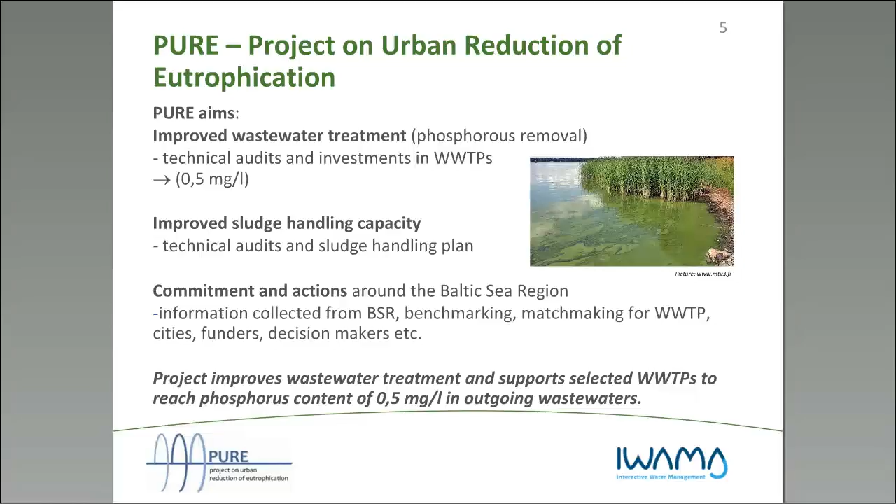So quite a few IWAMA partners have been involved in PURE. Oh, I guess we will come to the partnership in a while. The main goal of PURE was to improve wastewater treatment in respect of phosphorus removal, and it was largely built on our cooperation with HELCOM and aimed at reaching HELCOM's norms to reduce phosphorus content in the outgoing wastewater to 0.5 milligrams per liter. And other aspects that PURE dealt with also included improving sludge handling capacities of our partners, and in general trying to benchmark and commit to more intensive actions to fight eutrophication.

So we can go to the partners, who apart from the Union of the Baltic Cities Sustainable Cities Commission back in those days, also consisted of the John Nurminen Foundation from Helsinki and HELCOM, as I already mentioned, who was dealing with information dissemination and communication activities in the project. Other than that, we had several partners that are also present in IWAMA, as I said. It was Jurmala Water Company, Water and Sewage Company of Szczecin, City of Gdańsk, but we pretty much cooperated in practice with the Water Company of Gdańsk, and Lübeck, who is now one of our associated partners in IWAMA, was one of the regular partners in the PURE project.

Apart from that, we also had Riga Water Company, the Kohtla-Järve plant in Estonia, Mariehamn town, and Brest Water Company from Belarus. I hope I mentioned all, not quite in the order they are listed here. So some of the outputs worth mentioning in the PURE project included technical audits and reports that were conducted for almost all partner plants, I think, apart from Riga, who had from the very beginning an idea of what they wanted to invest in.

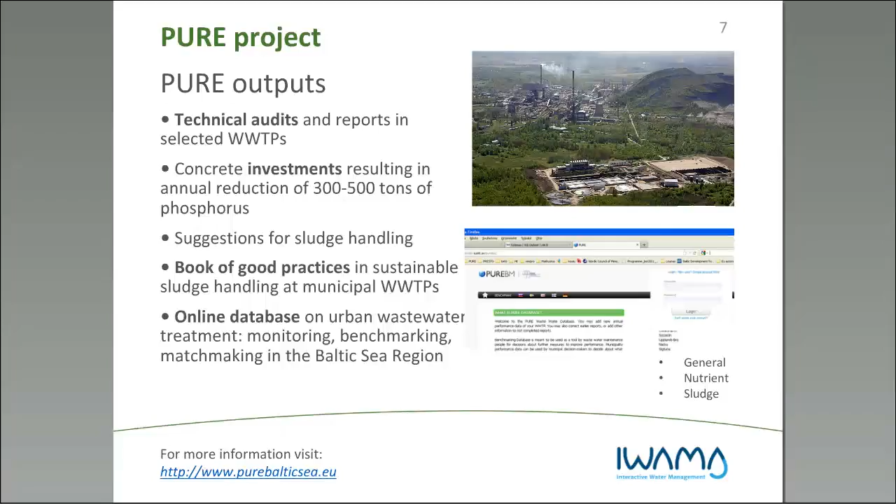There were also some concrete investments that altogether resulted in a substantial reduction of phosphorus. There were also suggestions for our partners on how to improve sludge handling based on project activities. In the end, we had a book of good practices on sustainable sludge handling, which also covered some of the legal constraints that countries had at that time, in 2011, for their sludge management, but at least we know that on the EU level not much has changed in that respect. One of the outputs was also an online database for urban wastewater treatment, which should help monitor how the process is looking on the level of the Baltic Sea region.

So now in the IWAMA project, we try to do this benchmarking in a bit of a different way. But as a result of PURE activities, 3 partner wastewater treatment plants - 2 from Szczecin and 1 from Kohtla-Järve - have been removed from the HELCOM hotspot list, which is a concrete achievement showing how the project managed to decrease phosphorus inputs and make a difference for the Baltic Sea.

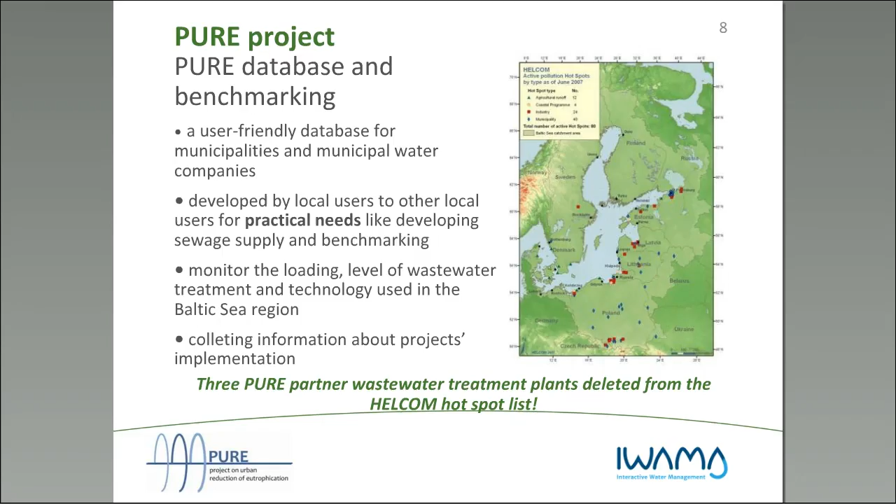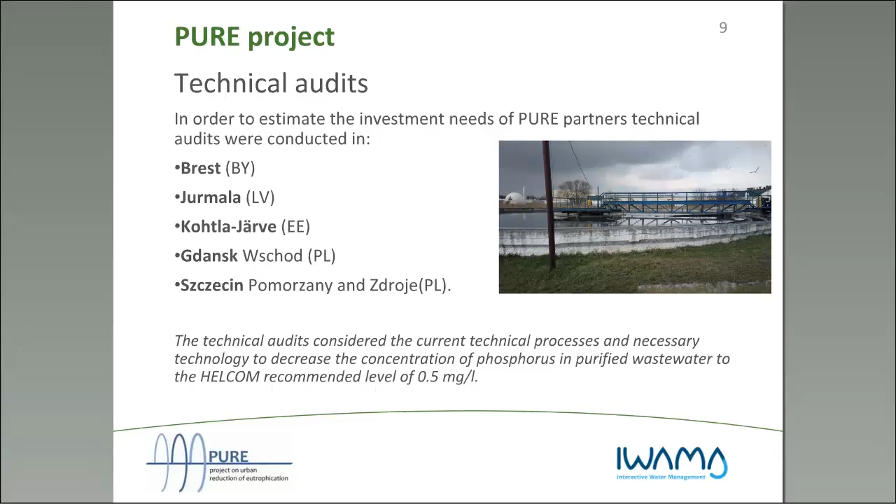Oh yeah, that's the map. Here's the map. In PURE, we had technical audits conducted in order to estimate which investments are needed, and some of those investments were still implemented within PURE's duration. The technical audits were done by an external consultancy company, a bit differently than we are doing it now in IWAMA. But altogether, the plants from Brest, Jurmala, Kohtla-Järve, Gdańsk, and Szczecin received audits and information on how they can improve their current technical processes in view of decreasing the concentration of phosphorus in the purified wastewater.

Based on the results of these technical audits, we had investments implemented in Riga and in Jurmala. I mentioned before that in Riga it was actually defined without the technical audit. So in Jurmala and in Brest - but Brest is going to be on the next slide. So, investment in Riga: you can see here a description of it. There were storage and dosing tanks for chemical precipitation installed, and also magnetic flow meters and an additional sludge thickening centrifuge. In Jurmala as well, new airflow meters, an additional polymer station, and the division of the aerobic and anaerobic zones.

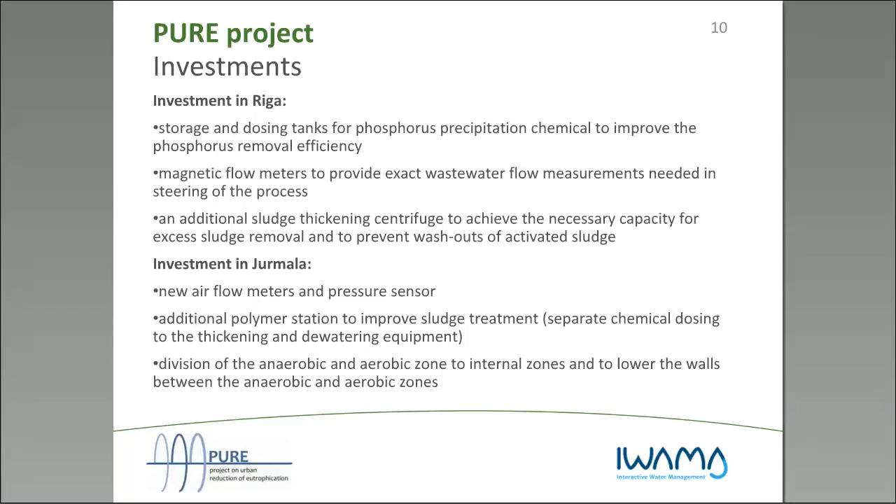You can read a bit more about PURE's outcomes in the brochure, which was our final publication. But I don't have it linked, unfortunately, anywhere. Yeah, these plants have been investing, and now Jurmala is going to invest in the IWAMA project as well.

PURE has also had its first pilot investment in Belarus of such kind. It was in Brest, and due to various reasons, it has been recognized that there is a need to export these good practices also to countries outside the EU, but still contributing to the state of the Baltic Sea through downstream pollution. So this was one of the integral steps to take, and because of that, it was recognized that there is potential to implement cost-effective measures that can improve the state of the sea.

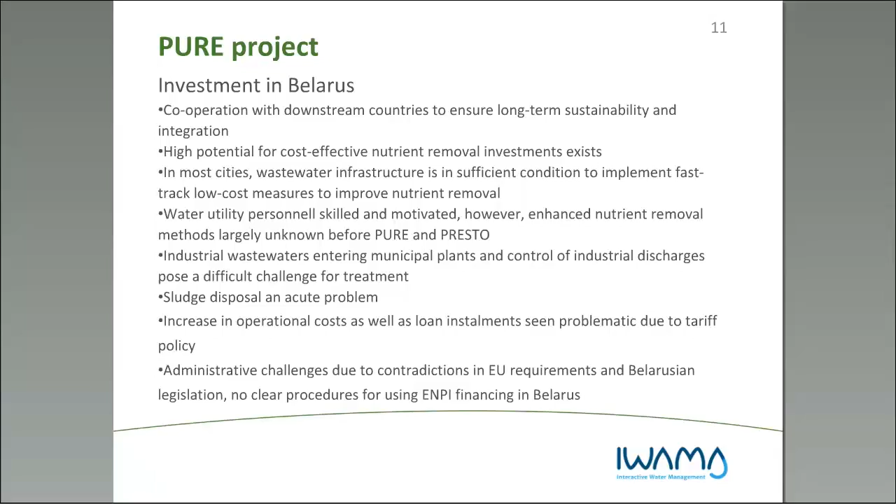The water utility personnel in Belarus were highly motivated and willing to improve their methods of work, but not necessarily possessing all the technical knowledge about enhanced nutrient removal or the need for it. There was also a great problem with industrial wastewater treatment and sludge disposal. Altogether, we have also encountered quite a few administrative challenges because of contradicting EU requirements and Belarusian legislation norms. But there was initial work started in this field and hopefully it will continue afterwards as well.

So a couple of more concrete words about the investment in Brest.

So the city is located very close to the Polish border, and it discharges through the Bug River to the Vistula River, and then all the discharges still end up in the Baltic Sea. And they had a very high phosphorus concentration in the outlet.

The PURE project investments foreseen chemical storage reservoir that would help to implement the chemical phosphorus removal system, dosing points before primary sedimentation and after secondary sedimentation, and altogether the annual load has been reduced up to 250 tons per year.

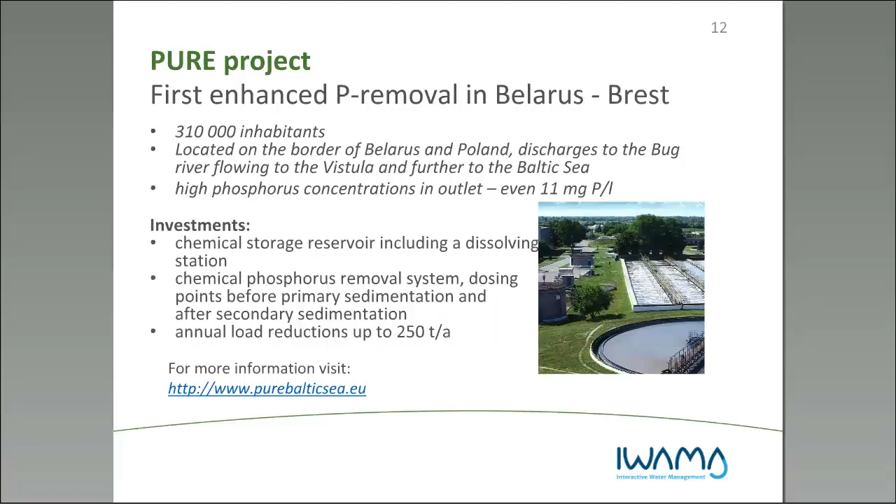As I said, there were different complications in this process. We had to extend the project in order to arrive at these positive results, but nevertheless, somebody has to be the first one to do it, and we are really happy that we started this work, which later has been quite successfully continued by the PRESTO project.

Again, PRESTO - some of the other partners of IWAMA have been partners in PRESTO, and it's the project on reduction of eutrophication of the Baltic Sea today, and it's been also funded from the same funding instrument, Baltic Sea Region Program 2007-2013, starting in 2011 and continuing in 2014.

So PRESTO approached what has been done in PURE and tried to mainstream the results, tries to do the concrete investments in more Belarusian wastewater treatment plants, but also it recognized some other needs that had to be taken into account.

So apart from clear environmental goals that PRESTO had to reduce the nutrient load for approximately 400 tons per year, there was also consideration for capacity development needs taken into account. And in case of PRESTO, it was mostly concentrating on university level education.

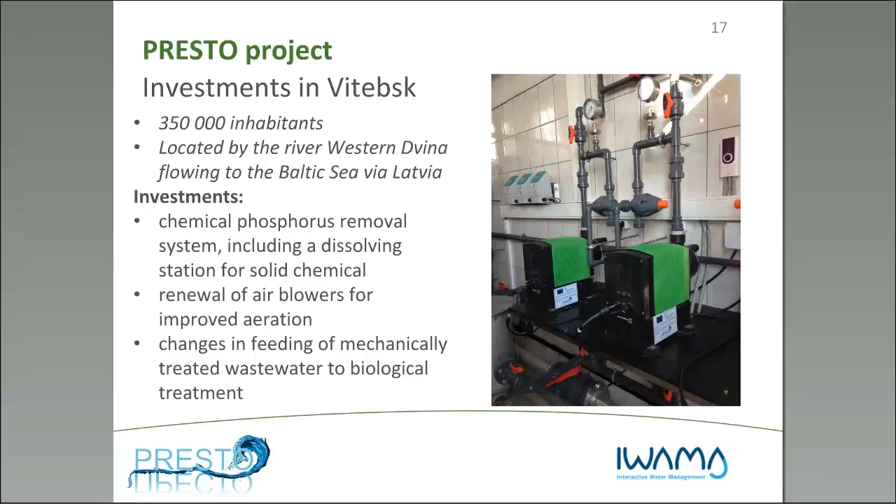So in Vitebsk, there was a chemical phosphorus removal system introduced. The city is located by the river Western Dvina, which also flows to the Baltic Sea via Latvia. It's a very big city of 350,000 inhabitants. And the improvements of PRESTO have included also the renewal of air blowers and changes in feeding of mechanically treated wastewater to biological treatment.

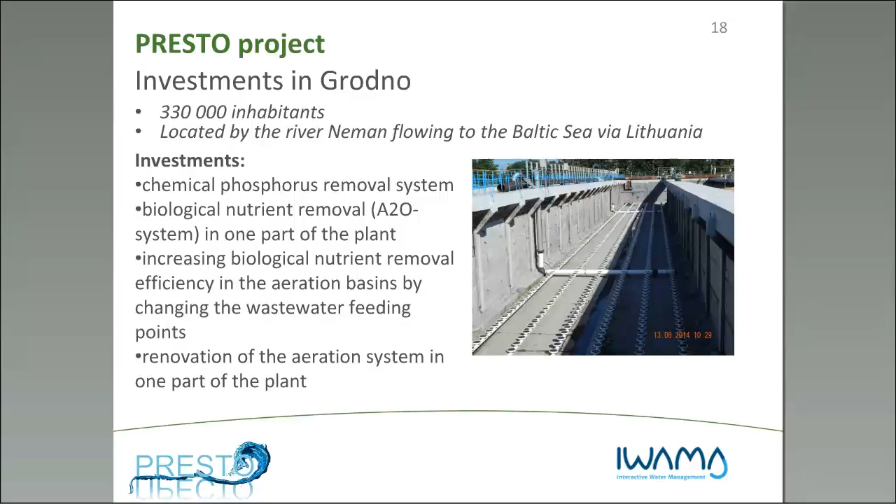In Grodno, which is a slightly smaller city and located closer to the Polish border, also chemical phosphorus removal system have been introduced, biological nutrient removal in one part of the plant, and altogether the renovation of aeration system in one part of the plant has been implemented as well. And by changing the wastewater feeding points, also the biological nutrient removal efficiency in the aeration basins have been increased.

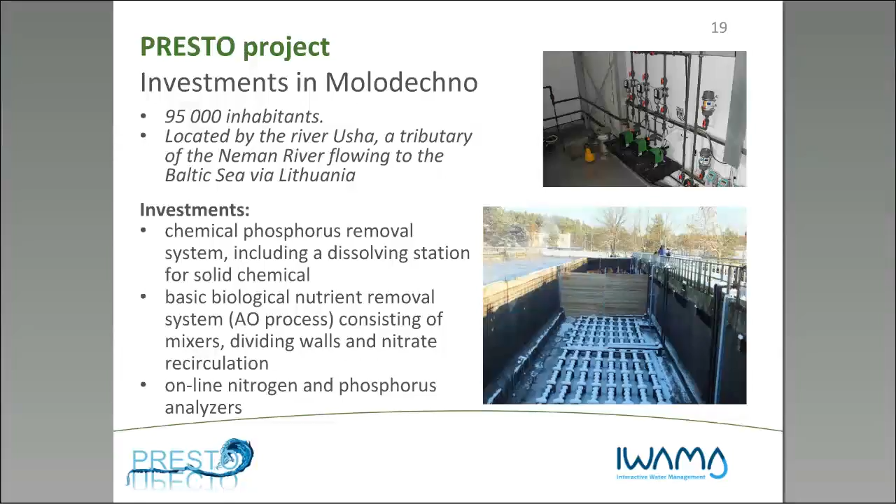So this was PRESTO investment in Grodno, and the last one in Molodechno, again an even smaller city of 95,000 inhabitants, is also located by the river that contributes to Neman and later flows to the Baltic Sea via Lithuania. Again, investment in chemical phosphorus removal, including dissolving station for solid chemical. The basic biological nutrient removal consisted of mixers, dividing walls, and nitrate recirculation, and online nitrogen and phosphorus analyzers have been installed in Molodechno during the PRESTO project.

There have been a lot of capacity development activities and awareness raising activities taking place during PRESTO, and those included thematical training workshops, similarly to those we attempt in IWAMA, but there were also 4 public forums for awareness raising. The partners have visited a lot of wastewater treatment plants for site visits, some of them being partner plants and some of them not, like in Germany, Berlin, Finland, Turku and Helsinki. And those have proved to be working well for capacity development goals as well.

Closer to the university educational aspect of capacity development, there has been a framework paper compiled on development of education on wastewater treatment in Belarus, and as a result of PRESTO activities, also new courses have been implemented at the partner universities.